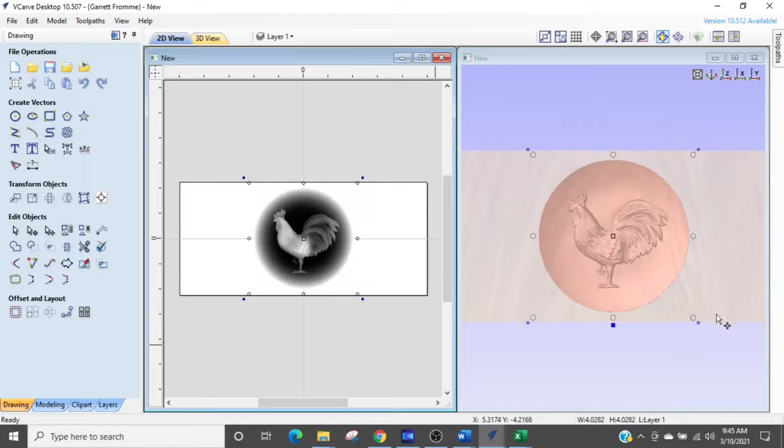It's a rooster, I keep calling it a chicken. Well, I hope you'll forgive me. We have to get this prepared for our 3D carving, and we are going to learn one way of doing it today, and that's going to be what they call the vector boundary method.

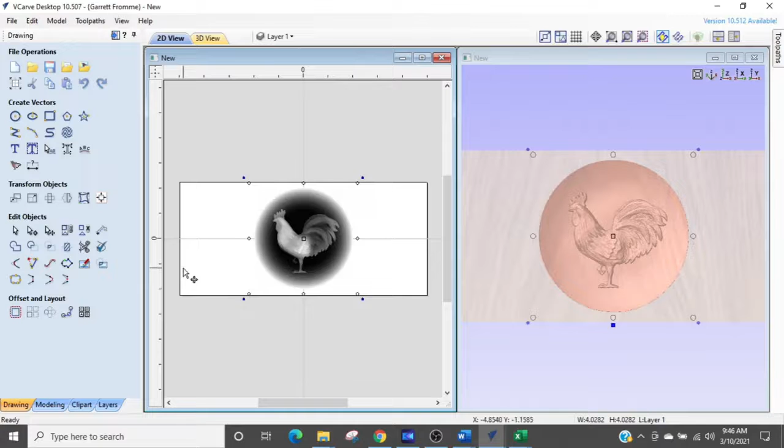So before we dive into that, I just want to show you something here. You see that we have our material here, it's kind of grayed out, and we have the rooster, which is a peach color. Now I'm going to grab this and rotate it a little bit, just like that.

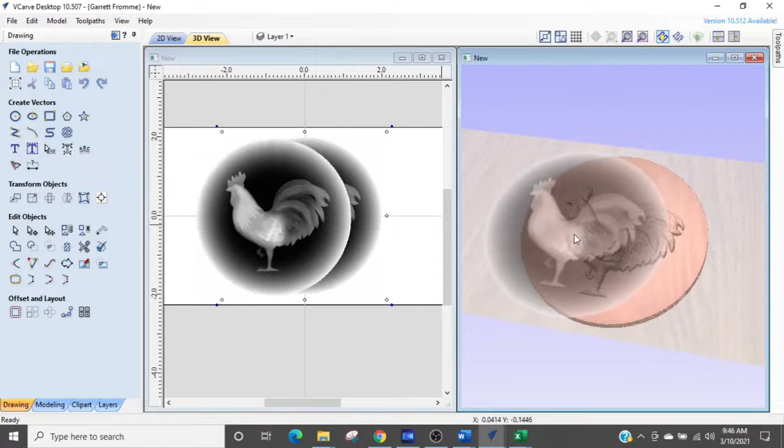One of the things you can do while you're on either screen is you can grab that rooster and move it around just like that, so you can reposition it while you're over your 3D model. I'm going to Control Z to bring it back. We're going to click the rooster. Now you can click the rooster in either one.

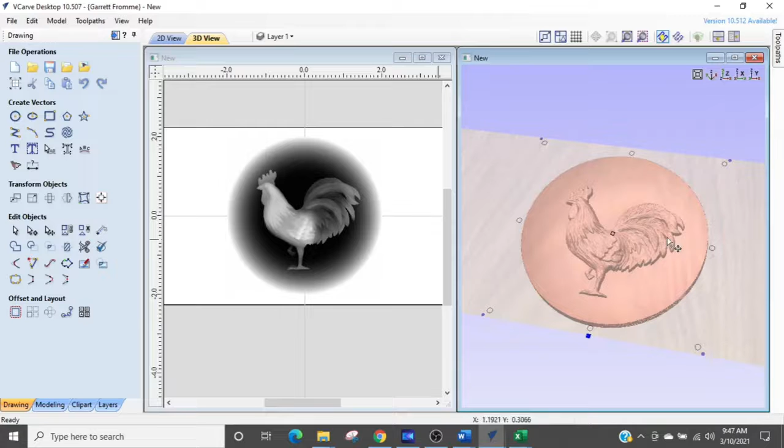One of the things we want to make sure of is the rooster is completely within the material, meaning it's not above the top surface. You will know by the color change of parts of the rooster.

Now I'm going to show you what I mean. You'll see there's a little blue button down at the bottom of the rooster when it's selected. When I click that, a little menu comes up. There's lots of stuff on this menu, and I'm not going to get into it.

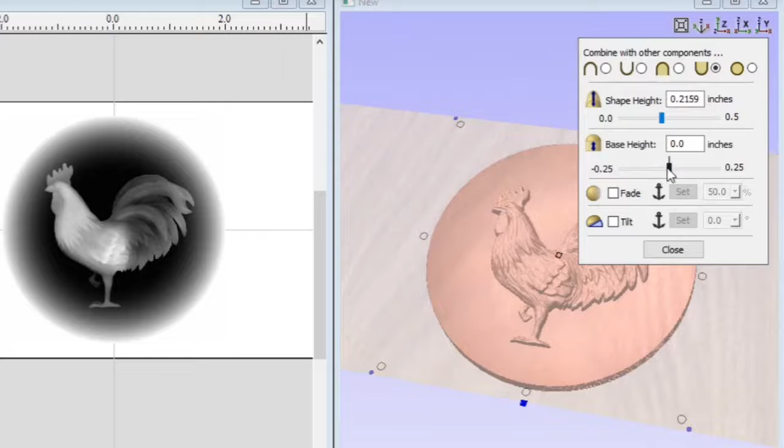I just want to get you to a point where you can actually cut, but I want you to see what it looks like if your project is sticking out and how to fix it. So when you click the blue button, this menu comes up and you'll see the base height slider right here and a field where you can put a number in. So if you grab that slider and slide it up, watch what happens with the rooster.

Now you see some pink or more orange has shown up. Those are the areas where the features of the rooster are above the top surface of your material. And we don't want that.

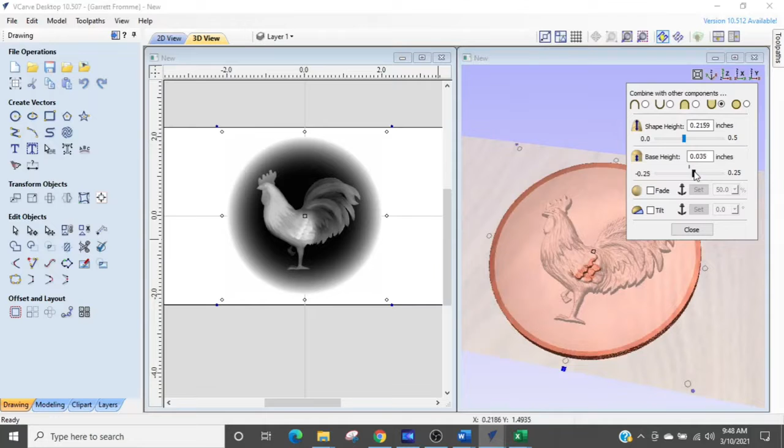So we are going to slide that back down, but I want to show you if we go too far, let's just exaggerate this a little bit. Okay, so now you see that the rooster—we don't want to do that.

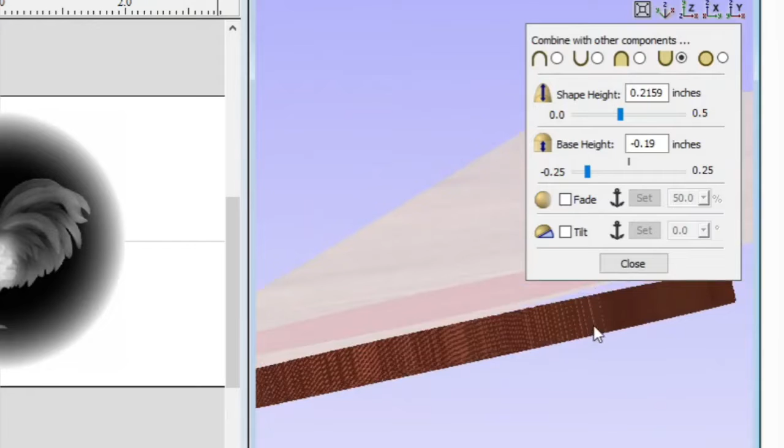Let me orient this the right way. So we are on the plane. I guess I can just push that button there. And now you can see that the rooster is actually below the plane. What we want to do is bring that back to the plane. So just type in 0 and it is moved back to the plane.

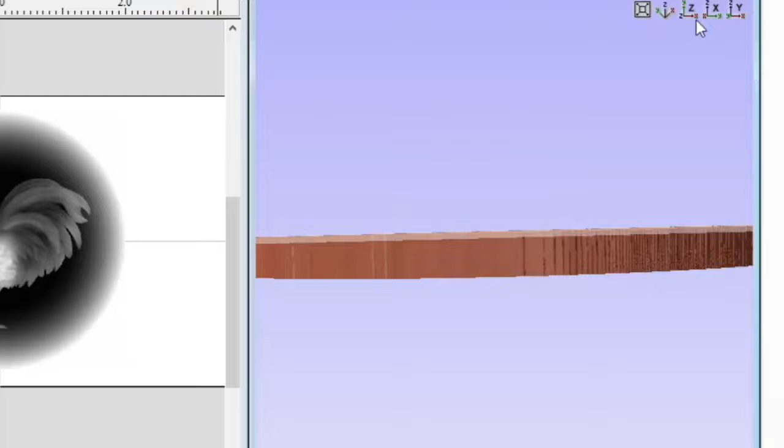I'm going to close that and reposition to Z. So what I did was use the orientation buttons up here on the upper right corner within the window that's showing the 3D. So our rooster is within the boundaries of the material, so we are good to go.

So what we're going to do now is come over to our left bottom and go back to the tabs, and we're going to select the modeling tab right down here. When you select that, now you see we have a level and we have our rooster. And the rooster is highlighted.

What we want to do is just click the rooster once. By the way, if the rooster is not selected at all, it's just going to be grayed out as it is there. If you click it once, it's darkened up, it is selected. You don't have to click it twice to get the buttons around there. So we're just going to highlight it like that.

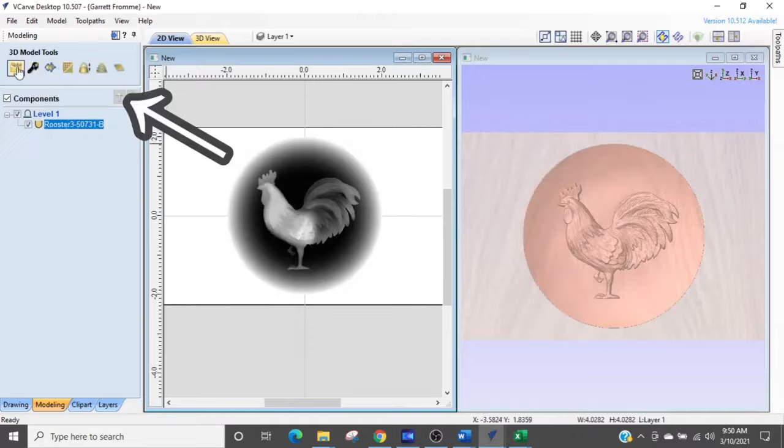Now I want you to see the features in the upper left corner. I'm going to just briefly explain some of them and then we're going to get into one or two of them. So the first one is import a component or 3D model. That's if you have purchased something from somewhere, a 3D model, you would use that feature to import it into your drawing. The next one is change the properties of the selected components.

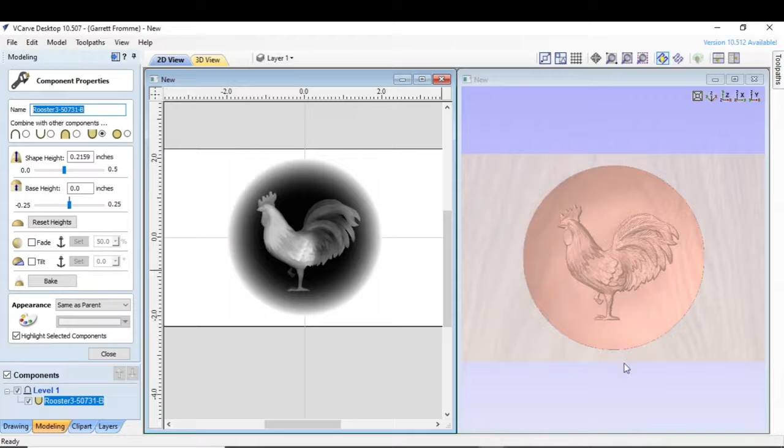When I click that button, you're going to notice something. This has all the same features as that little pop-up did when we had the blue buttons selected over in the 3D window area over here. So we're not going to mess with that right now because I just want to get you to a point where you're carving something pretty cool.

Then we have this create a vector boundary around the selected components. Now this is the method we're going to use, so we'll get back to that. And we have apply a smoothing filter, which we're not going to use at the moment.

Next one is scale the Z height of the model. This is where you can tell if your model is above or below the surface or the bottom of the material. And when we open that up, as long as we're seeing maximum Z is a negative number or 0, but does not go positive, we are in good shape. And it is 0.2159 minus, that means it's not going through our material. Our material is 1/2 inch thick. We're going to cancel that.

And the next one is slice visible model into individual component slices. So that's when you have a 3D model that is thicker than what your machine can handle, then you'll segment it out. So let's just say you're trying to carve a full-size bust of a head. Then obviously for most CNC routers you can't get that. So this will allow you to segment it out so you can glue all the pieces together.

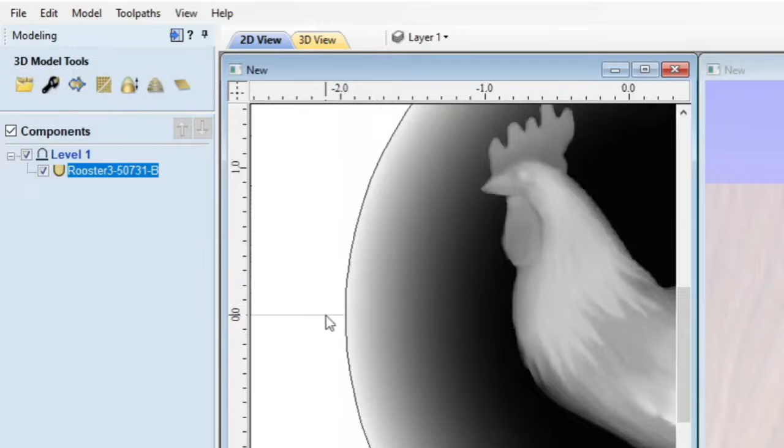So what it did, it actually created a circle around the maximum diameter. What this is doing, it's telling Vectric that all the 3D work that it's going to be doing will be contained within this boundary. So that is all we really need to do.

It's now time to set up our toolpaths. So up at the top, upper right, you've got the little blue arrow button that says go look on the other side of the page. When you click that, the toolpath area shows up. And we are now going to explore the 3D modeling toolpaths and generate some G-code for this.

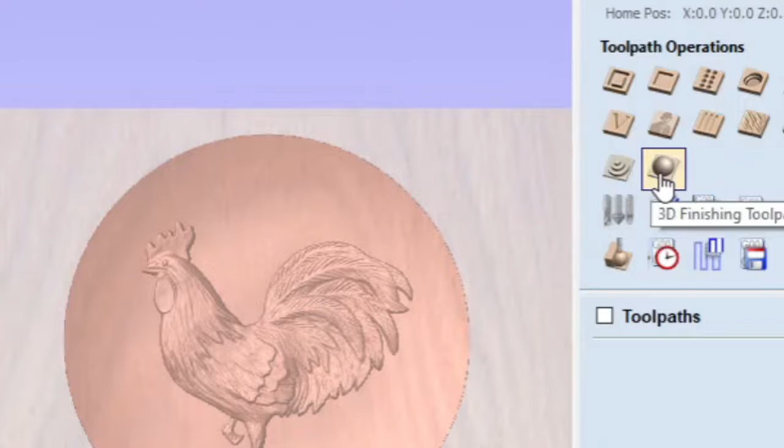This is our roughing cut, where we're hogging out some material that's just to get it out of the way. The other one is going to give all our finished details and make a very nice project. So we click the rough machining toolpath. So the first thing you want to do is hog out some material. And so we want to select our tool or our CNC router bit. So you select it. Typically you want to go with a 1/4 inch end mill. And that is what we have selected.

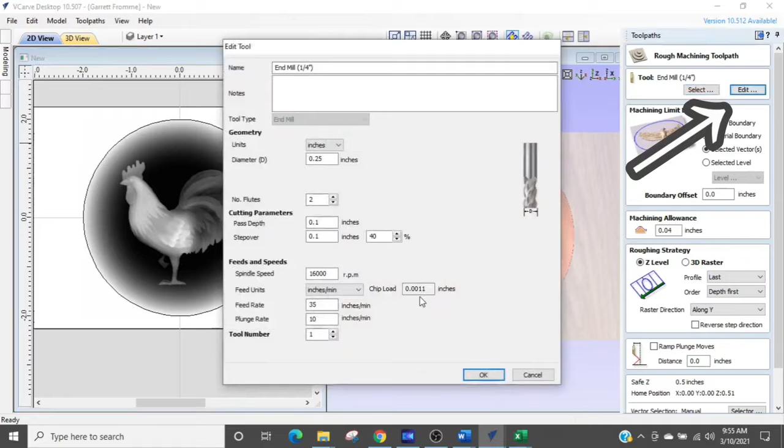And then I'm going to go into the edit button. And what that will allow me to do is change the router bit setting for this job only. So I open that up and there's several things. I've got my step over. That's one of the important things that you need to pay attention to, and the feed rates and the plunge rates. My step over is at 40%, which means it is going to make a cut, and then it's going to move over 40% the diameter of the router bit, and then start making another cut.

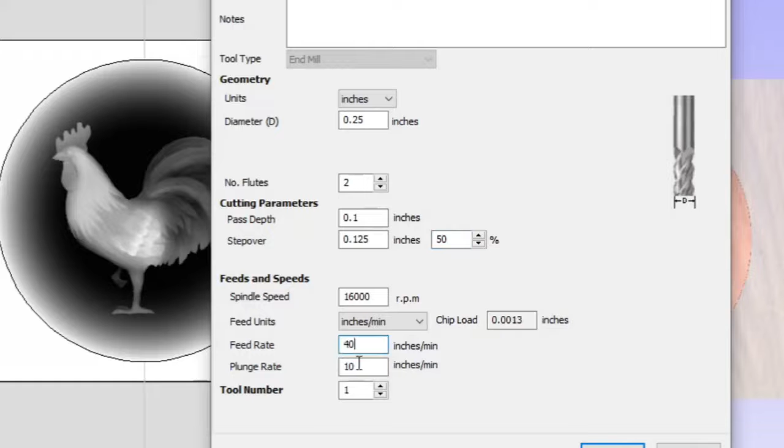What I'm going to do is change just to 50%. And I want my feed rate to be 40 inches per minute. My plunge is 10 inches per minute, so that's good. And we're going to go with that. Now, in the next one, it says machining limit boundaries. So there's several different features here in order to get you to making a 3D part. We're not going to go into deep explanation of these things. I'm just going to brief over it.

You have the model boundary. That is the boundary of the model itself, which we could work with. We have the material boundary, which is the actual job size right here, the whole board. And we have selected vector, and then we have selected level. So I'm not going to go into that feature. That's getting a little more advanced.

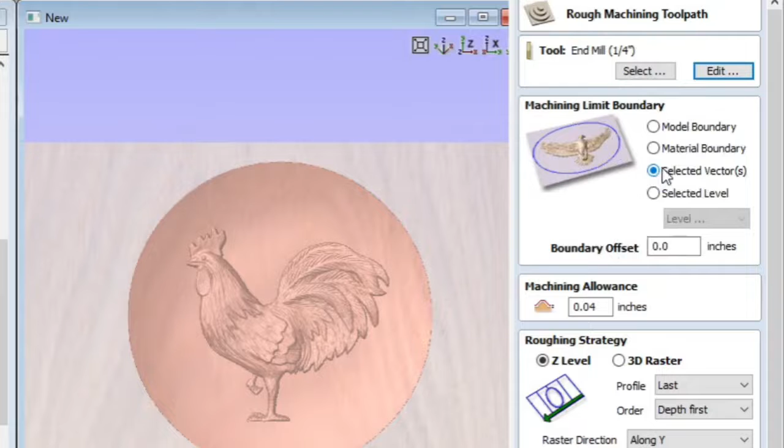What we want to do is go to selected vector or vectors. What we're telling Vectric to do is only work within the vector that we've created. So you remember over here we created that circle. So we're going to select that circle. And now that is almost ready to go. You're going to see boundary offset.

When you use a number in an offset feature like this, it essentially tells the software that we are changing the diameter of our cutting tool. So I'm going to do another video on that at some point so you understand this type of offset factor or number. And then we go into our machining allowance. So this is something just to be aware of what it does.

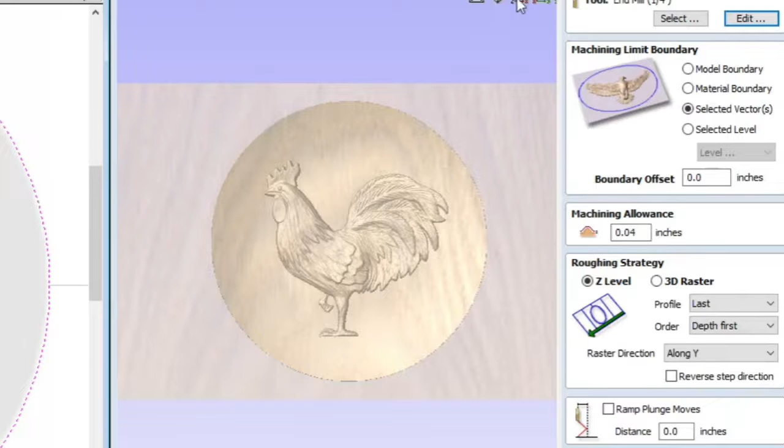I am going to reorient this rooster here to look at the plane and just kind of drag it down just a little bit so we can, there we go. All right, so this is the top of the job.

This machining allowance says that wherever the roughing bit goes, it will never go closer to the finished surface than the number that's in here. Meaning we have a 0.04 currently in this field. That means that the router bit itself, the closest it will ever get to the finished surface of the 3D carve is 0.04 of an inch.

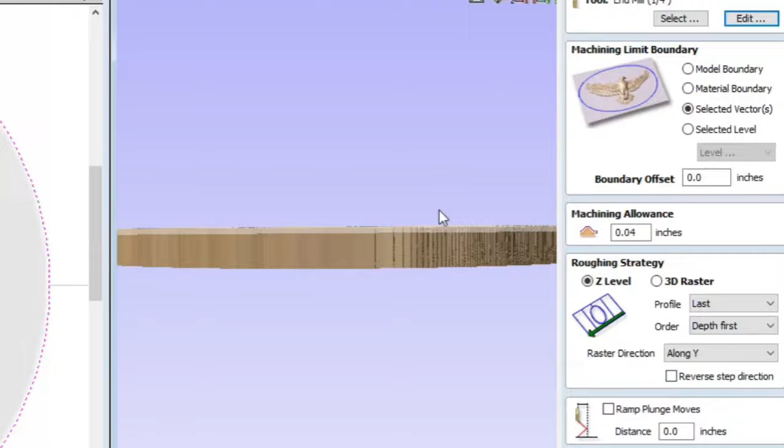So it's leaving that depth of material at some given point. And that gives us the finished material that we can carve off in our finish operation. So when we're looking at the top of the material, let's just pretend this is a 3D surface, so it's got contour to it. The router bit will never come closer than a 0.04. So I hope that made sense.

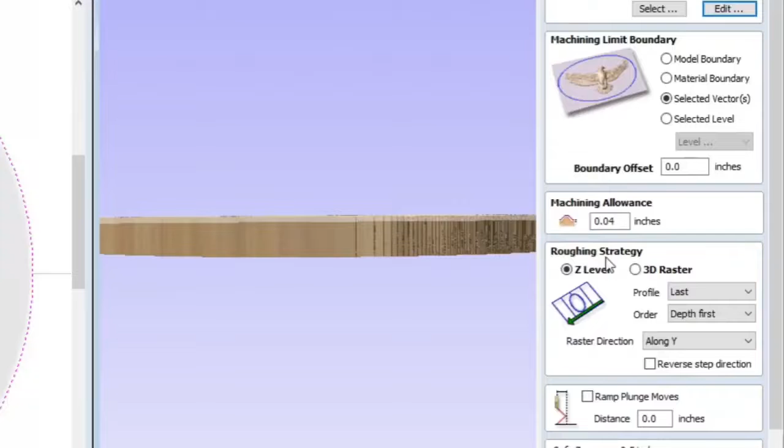All right, the next one is the roughing strategy. There are two different ways that we can do this. The roughing strategy is basically how are we going to cut this material out? The first one is Z level, and essentially that's like an offset type of cutting pattern. If you've done any cutting, you'll know that the offset will find the location of some point and start to work its way out, going around the perimeter, until it gets most of the

material cut out. The 3D raster actually follows the contour of the project. So we're going to demonstrate this. I'm going to just stay with Z level, and before we get back to that, I want to point this out to you. We have a ramp plunge move. Whenever you're using a down bit, you want to use a ramp plunge move. A plunge is when the router bit goes down into the material.

With a down cutting end mill, the flutes on the end mill are rotating negative relative to the rotation. If you've done some work, you know that it leaves a very good edge. However, there's a lot of pressure being applied at the bottom because it doesn't have a bottom cutting edge, so it has to work its way in. So if you try to do a straight plunge with a down bit, you can potentially run into some problems. So you always want to do a ramp in any of your jobs, and you want that ramp to be at least half the diameter of the tool. So we're going to do a 0.125 since we're using a 1/4 inch router bit.

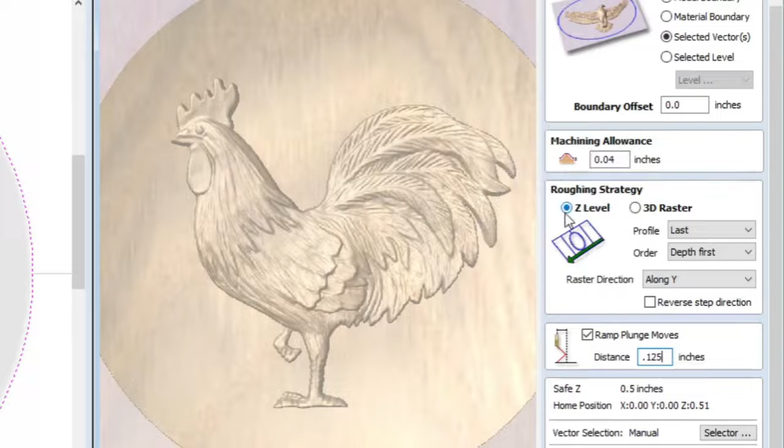Okay, so that was just an important note I want you to understand. Just always, by default, use a ramp plunge move. Just do it. Okay, so we are in a Z level roughing strategy. I'm going to click calculate, and what we're going to see is some lines here on our project, and I'm going to preview that toolpath. This is basically what that 1/4 inch end mill is going to cut out. So essentially it just took out material it didn't need. This is to get stuff out of the way.

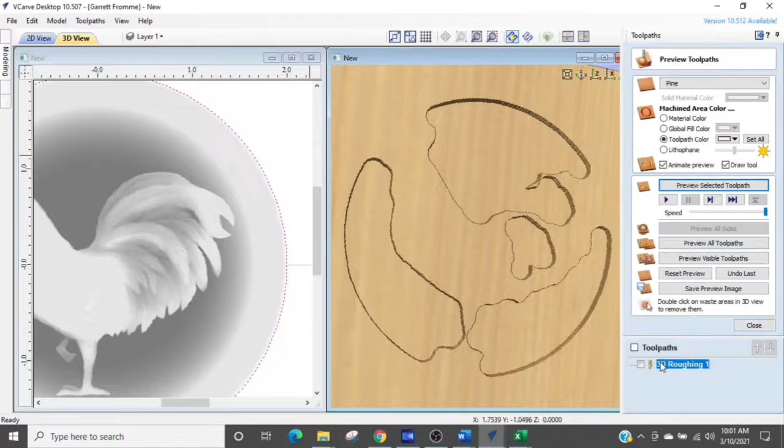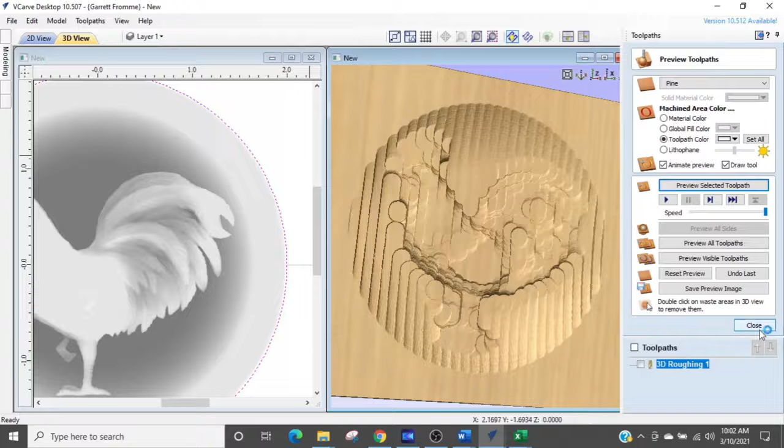Now I'm going to go back into this toolpath by double clicking it, and I'm going to change it to the 3D raster. And I'm going to calculate, and you can see right away that the toolpath looks very different. If I preview it, now we've got something that looks kind of like a chicken forming. So let's take a look at something. I'm going to close that and go to the clock right here to see how long that toolpath took. It says it's going to take about 5 minutes and 30 seconds. So I'm going to close that.

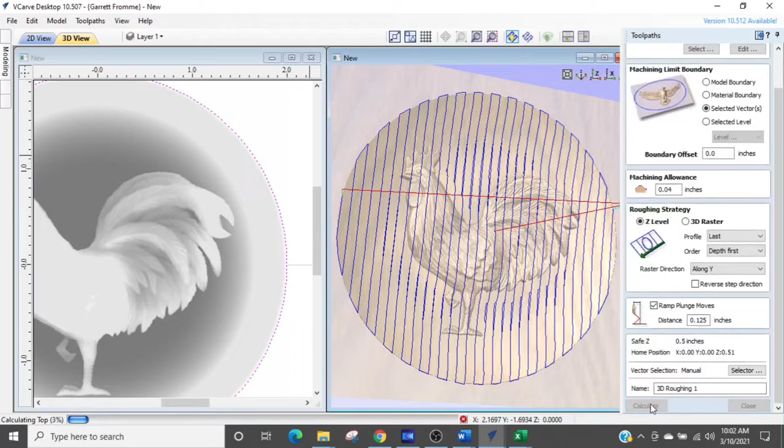We're going to go back into this, and we're going to select the Z level offset. We're going to calculate, reset, and show the toolpath. Then I'm going to go back to the clock. This is 2 minutes and 12 seconds, so half the time. Now that short period of 2 to 5 minutes is kind of nominal, but it can be an issue if you do much bigger projects. So we're going to stay with this toolpath operation, and I'm going to close the clock.

We have our roughing done now. We are now going to go into our finish toolpath. We're going to click that. Our screen looks generally the same for job setup, but there are some differences here. The first one is, which router bit are you going to use?

Now, one of the router bits that's commonly used in carving is the carving bit, this long, mean looking guy right there. The other bit we're going to be talking about is the 1/8" ball end mill. Let me just zoom in a bit. And you see the flutes on it are rounded. And there's a big difference between the two, and it's the diameter. So we'll get into that a little bit, but I just want you to understand the difference between the two that we're going to be talking about now.

So I want to tell you, you don't necessarily have to have the carving bit. You can do a very nice job with a 1/8" ball nose end mill or a 1/16 ball nose end mill. So what I'm going to do is I'm going to select the 1/8" ball nose, and we'll show you the difference. So we're going to select that, and we're going to just click OK. And then you remember we have the machining limit boundary. We again have the selected vector or vectors, and it is selected over here on the left.

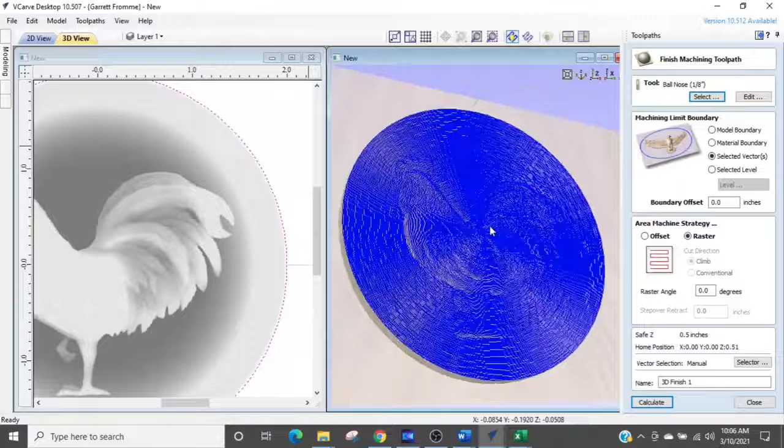We're going to go back into the finish toolpath, and we are going to use the raster toolpath. Now, before I do that, I want you to just look at the blue pattern over here. You can see it's circular as best as you can. The bit started out in the center and worked its way out. Now when we calculate on a raster, it's going to go side to side. So the router bit will start at the bottom, or the defined location that you set, and that's going to go back and forth, working its way to carve it.

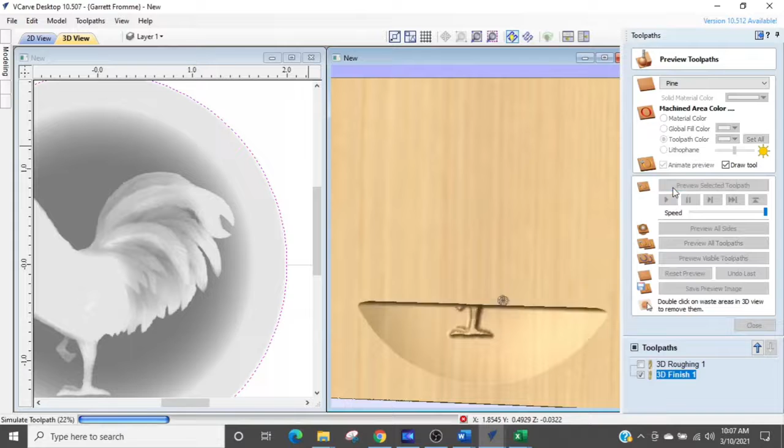Now watch the toolpath when I run it. I'm going to have to refresh that so you can see it. So you can see it's going back and forth. And the image looks pretty much the same. Now you see we got a little bit of cusping going on right in here. Generally, in projects like this, that's not going to be noticed by the person who gets this project or you. You're going to see the rooster. You're not going to see the little details in the rooster. However, I want you to see what happens when we get really fine. So I'm going to open up my snipping tool and take a quick picture of that so you can see what the differences are.

What we're going to do now is use that carving bit, the long, mean looking bit. We are going to go back into the finishing toolpath, and I'm going to select back to offset over here. And then we're going to select our tool, and the tool we are now going to select is the 5-degree ball nose tapered end mill. This has a very small radius on the end, a millimeter radius.

And let's take a look at our step over, which is 8%. We're at a 40 inches feed rate. Let's go 45 since I changed the other one to 45, because I want to give you a comparison of what the difference is, not only in how the picture looks, the finished project, but the time that's going to take.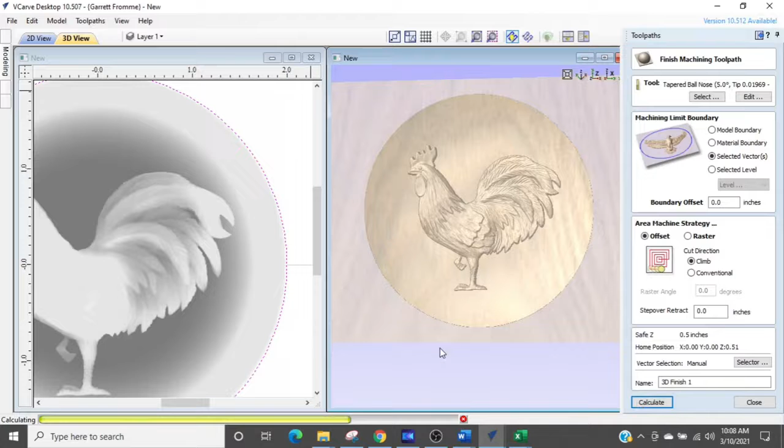So we are now going to calculate, and the computer is going to take a little bit longer on this because it has a lot more calculation to do. Before I even show you the image, I want you to look at the time that it's going to take. So we're going back to the clock, and you can see now it's 1 hour 31 minutes. So we are virtually an hour longer in runtime.

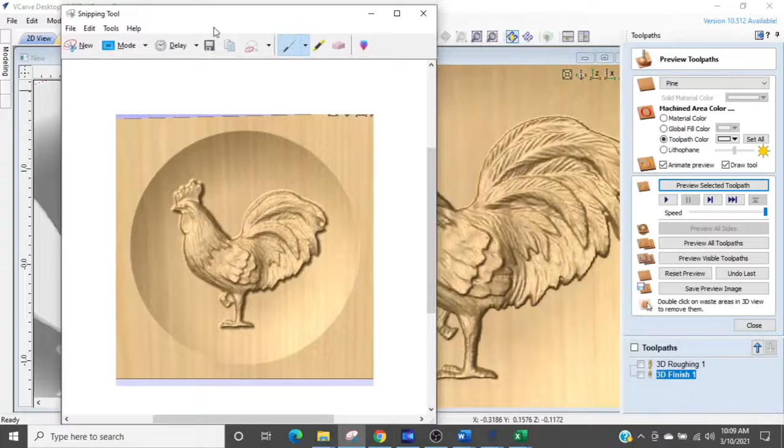And if we run this toolpath, our rooster is much more crisp. Let's open up this image. You can see the feathers are much more detailed. The wings, let's take a look at the face of the rooster. It's definitely cleaner. There's no cusping down on the bottom here. Now you see there's a little bit of radial marks here. You don't really see that in the project when it's running.

So it's up to you if you want to make the trade-off. If you want a really highly detailed project, then you are going to use the finer bit. In my eyes, when I give a gift like this to somebody, which is going to be a sign, a farm, like I said, they're not going to see that. They're going to see the whole sign and see the rooster carved out as it is in this image, and they're going to be very happy with the project. So just keep in mind, what is your buyer, if you were selling the sign, what are they really going to see? They're going to see the entire project.

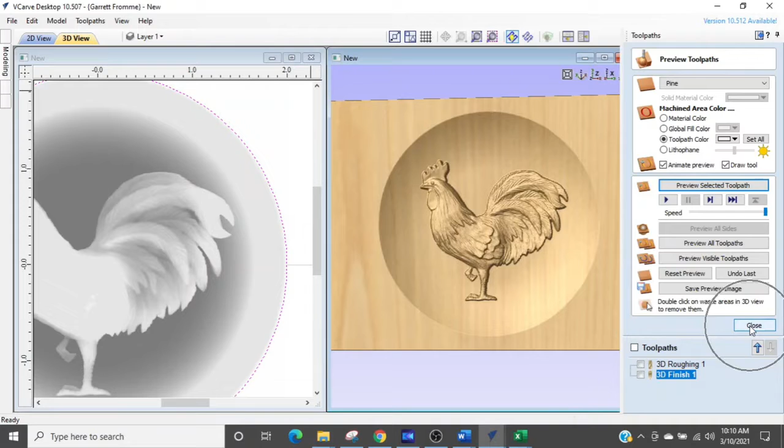So now what we're going to do is save these toolpaths. So I'm going to put my USB drive in, and I'm going to get this alarm, which is driving me crazy. And we're going to close this, and now we're going to go to the save area, and we're going to click that. And what we're going to select is the visible toolpaths to multiple files. And down below, we're going to select the toolpaths. What it's going to do is create all the files at one time. And when we say visible toolpaths, when you select the toolpaths down here in the lower right, and they're checked, that means they're visible. And then we're going to go to the Save Toolpaths.

Now, I want you to understand a little something here. Some people ask me, how does the machine know when to change the router bit? Well, that's going to be determined by your post processor. The post processor right here is a file that tells Vectric the settings of your CNC router. If your CNC router has what's called a tool changer on it, where it can have multiple tools already there and the machine will change the tools itself, then your post processor will set that up in Vectric, and Vectric will know that, and it'll write the files accordingly. So you can have one G-code file to run the whole thing and the machine will change itself.

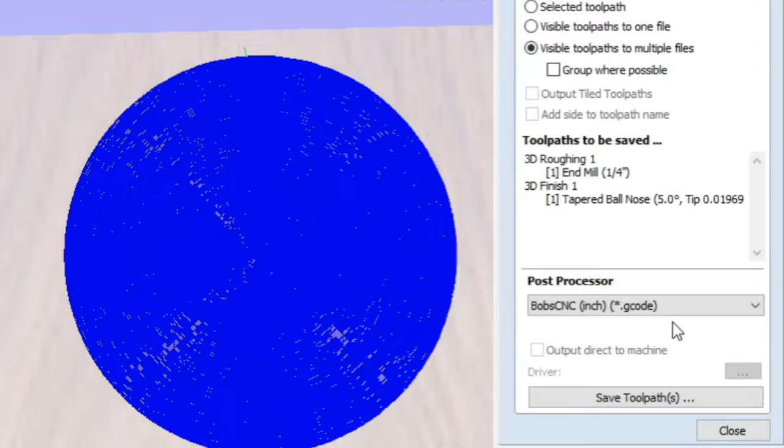However, I am using a BobsCNC. It does not have that feature, so it will not allow me to write files with different types of tools. It'll separate the files into separate G-code files. So I'm going to show that to you. So we have both of these selected, and we're going to save the toolpaths. So I'm going to click that, and I'm going to scroll to the USB drive.

And you can see it is naming this 3D Roughing 1. Now, if you look down here in the lower right, there are the two toolpaths. One is 3D Roughing 1, and the other one is 3D Finish 1. But it only has one name here. What I'm going to do is just click Save. And then I'm going to open up that directory. It is right here, and I'm going to refresh it.

And here's what we have now. We have two G-code files. We have 3D Roughing 1, and the other one says 3D Roughing 1. So that's the first part of the name. And then in the second part of the name, it says 3D Roughing 1 and then 3D Finish 1. So now you understand we have two different G-code files that it created.

So essentially, you can't run both bits at one time. You're going to have to load up a separate program. Okay, so there we have that, and we are now going to take it over to the CNC router, and we are going to run this out. I'm going to be cutting this job into this piece of walnut. So that's 5 inches wide, and I actually said it was 4.5 in my software. So our rooster is actually going to be 4 inches in diameter. Not very big, but you're going to see the detail you get out of it.

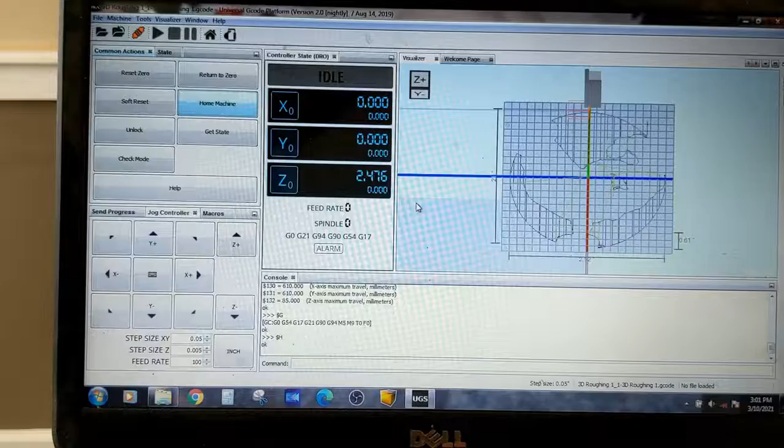I'm using Universal G-Code Sender, and I have just inserted my flash drive into the computer. So I'm just going to load it up by clicking the file open. And then I have to pick the file. So the first one is going to be the roughing program that says Roughing 1 behind it. Remember, we have the roughing and the finishing. So we're going to select that one first, and you'll know on the image if you've got the right program. That is basically ready to go.

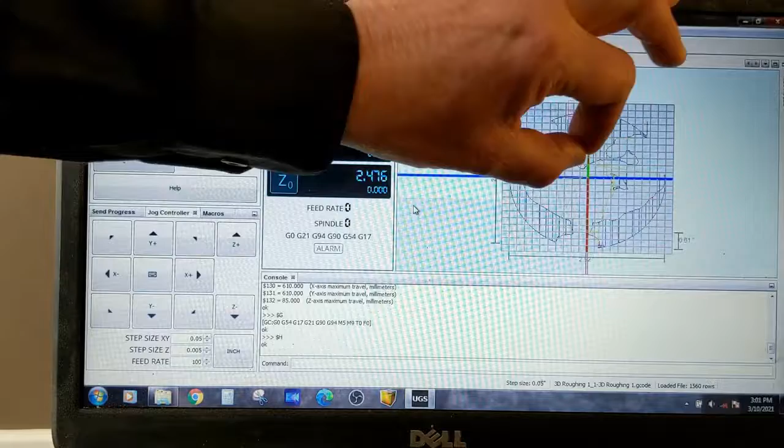Now we have to zero out our start position on the machine. Now you can see on the image here that the start position is right in the middle of the job. So I'm going to have to center the tool, the 0 point, up in the center of the job. And the way I'm going to do that is by starting with a pen mark. So I'm going to just pick half the point.

So we've got 4 and about 4 3/4, so it's going to be 2 and a little less than 2.5. So I make a dot there, and I know it's pretty much on center there. Yeah, we'll move it over just a little bit. So I'm going to put it right there where I got that little X. So we are now ready to go.

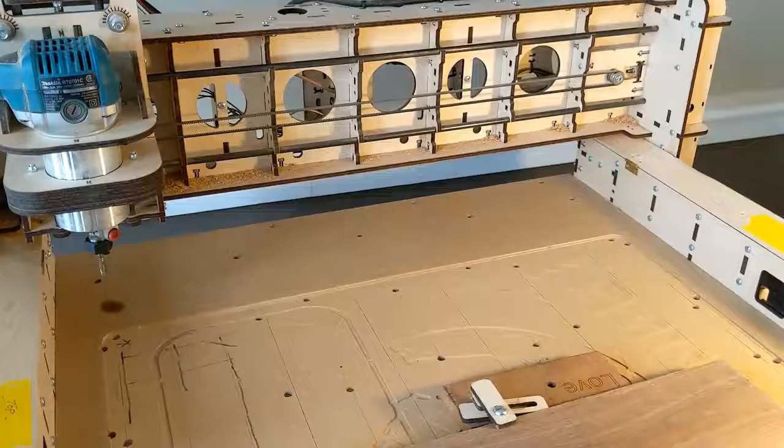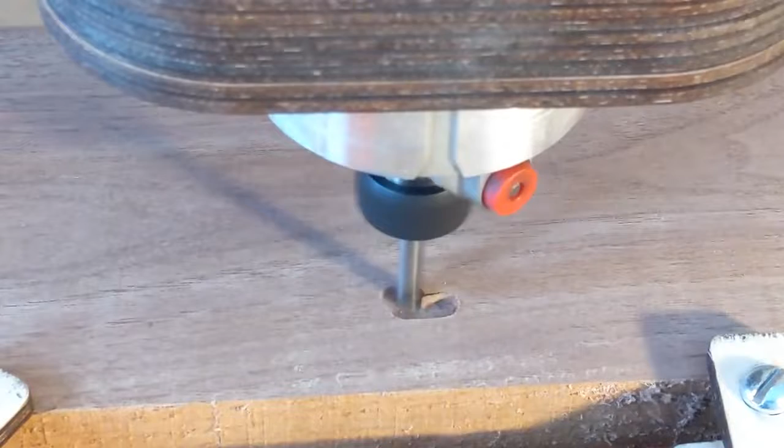All right, let's run this job out. So we are starting off with the 1/4 inch down bit, and it is doing a raster type of cut, back and forth. That's the way Vectric sets it up, because it's just roughing stuff out. It's the most efficient. And I want you to take notice, every time it goes down, it does a little back and forth move. That's the ramping in.

So it's just going around. We're going to speed this up a little bit as it cleans things up. Not much material is being removed. And now it's doing what's called an offset profile cut, just cleaning up the outside.

So now I want you to take a look at the rooster. I ran the other type of toolpath and forgot to film it, my apologies. It ran about twice as long as that one did. And now we're going to use the 1/8 inch ball nose end mill, and you're going to see it'll do just fine.

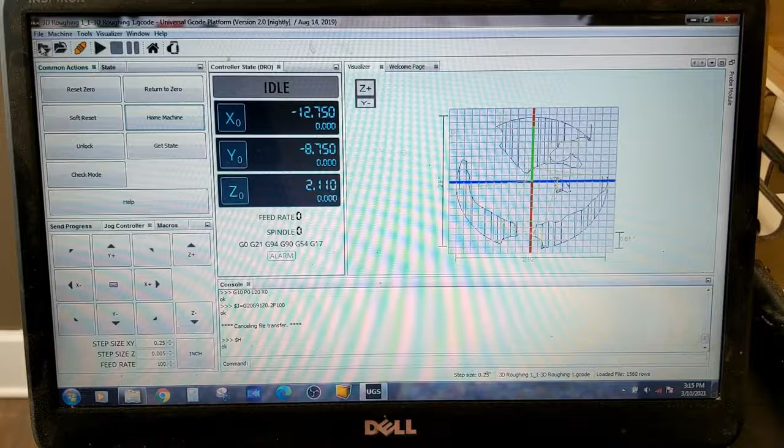So we've got the flash drive loaded in the computer, and we are going to open it up. We've got the two programs, the roughing program and the finishing program. We're going to select the finishing program, and it's going to take a second to load up, but here it is. It's all blue because there are so many tool paths.

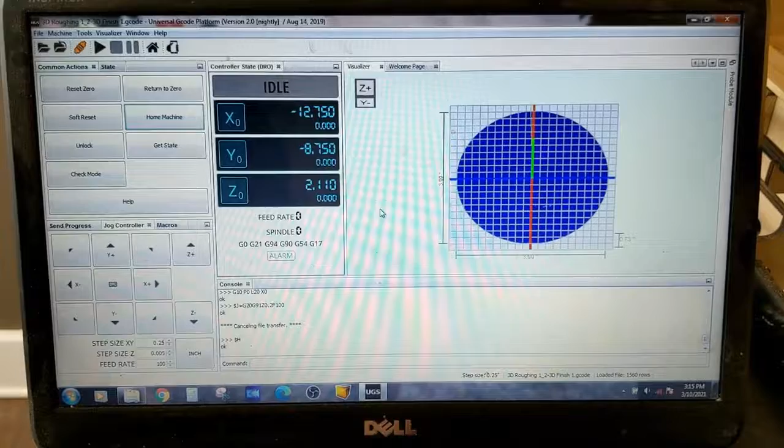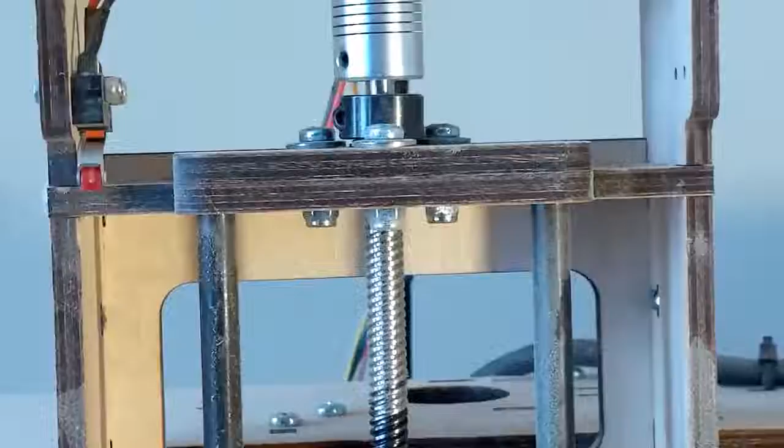All we have to do is hit start once the tool is set up, the router bit. And here we go. It's doing that offset type of cut where it started in the middle and is working its way out, stepping over by 7% each time. The router bit and router are moving up and down as it's making this move. You can't always see it, but you can watch your collet go back and forth.

That's how we know this thing's running. It has 140,000 lines of G code to do all of this. It's a very long program, however it's a small part. Just imagine when you have something twice as big.

You can see again, it's riding up and down as it moves along. And what's really cool about this is the surface is almost - you don't need to sand it. It's very smooth.

So let's speed it back up and watch how this forms out. Very cool, rooster showed up. Now I'm not running this out to the complete bowl shape because this was done for this video.

So now we're going to do a comparison. We are going to use the carving bit, and because it's going to run at least 3 times as long, we're not going to run the whole thing out, just enough to get the rooster. We're going to run it in the same type of tool path, at the same feed rate of 45 inches per minute, with an offset of 7% or 8%, I don't remember. But you can see it's taken a bit longer to work its way out.